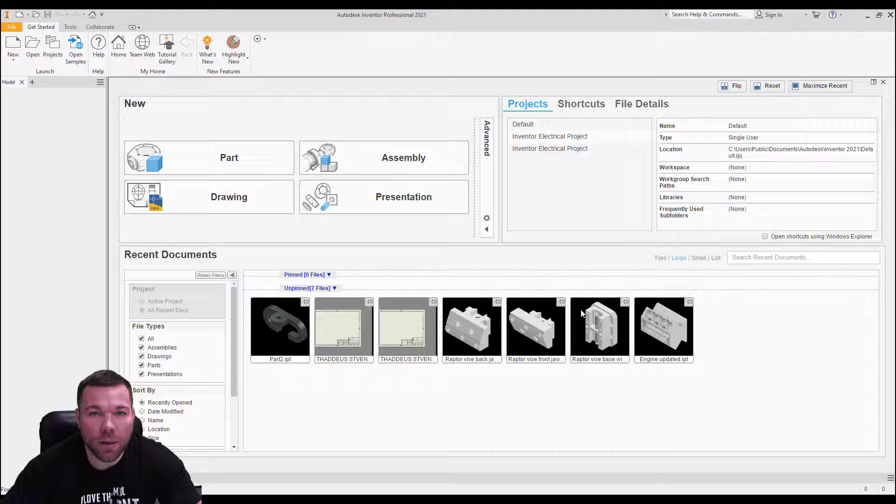The first thing I did was open a new part drawing, and we're going to start a sketch on the XY plane. As in past videos, we are not assembling these parts, so it's not critical necessarily what plane we create them on.

I'm going to go ahead and just do a rough sketch of this. It looks like it's 1 3/4 high. I try to get it kind of close to how big it is, just so there's not too drastic of a change when I go and apply dimensions.

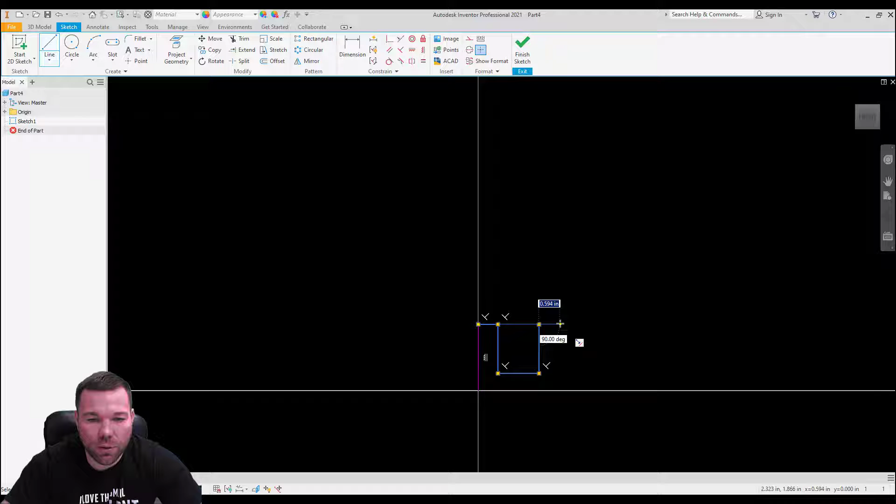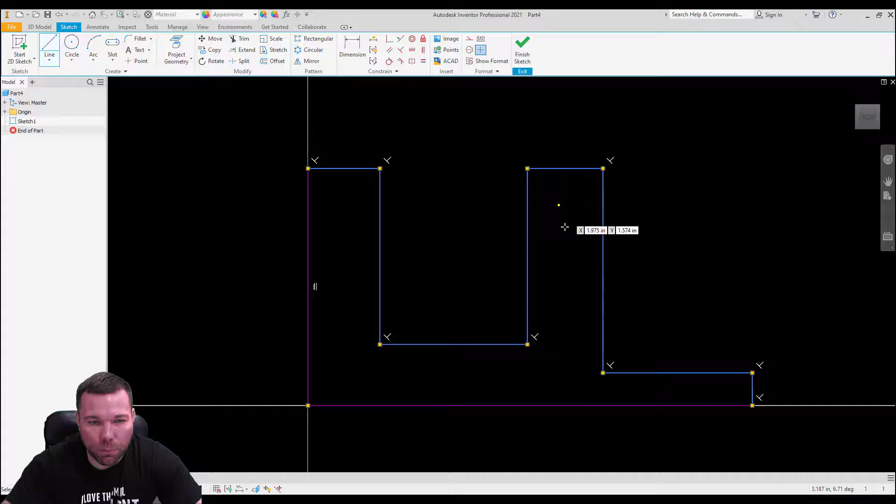You'll notice I purposely offset these, and that's because they are offset. If I had them in line, they would actually lock in line, and then it's sometimes a pain in the butt to get them out of line. So I automatically make sure that the profile is about as correct as I can make it.

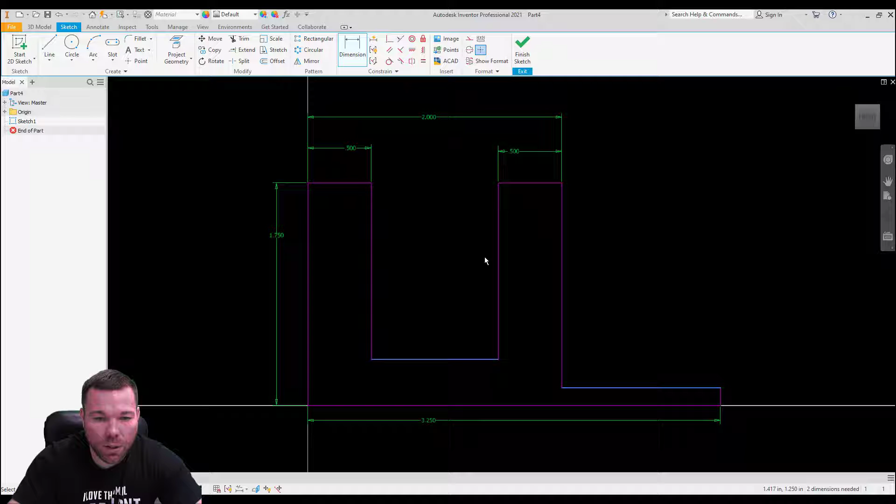So 1.75. This one is 3.25. These are 0.5. This is 2.0, and I believe this is 0.5 as well. This is 0.75 high, and I believe this dimension is 0.5 as well.

All right, so we are fully constrained. I'm going to hit finish.

I'm going to extrude this, and I'm going to do a symmetric mid-plane extrude. In this case, it looks like we're extruding at 2.5 inches, and by the appearance of the book, they're doing the same thing here with a mid-plane extrude as well.

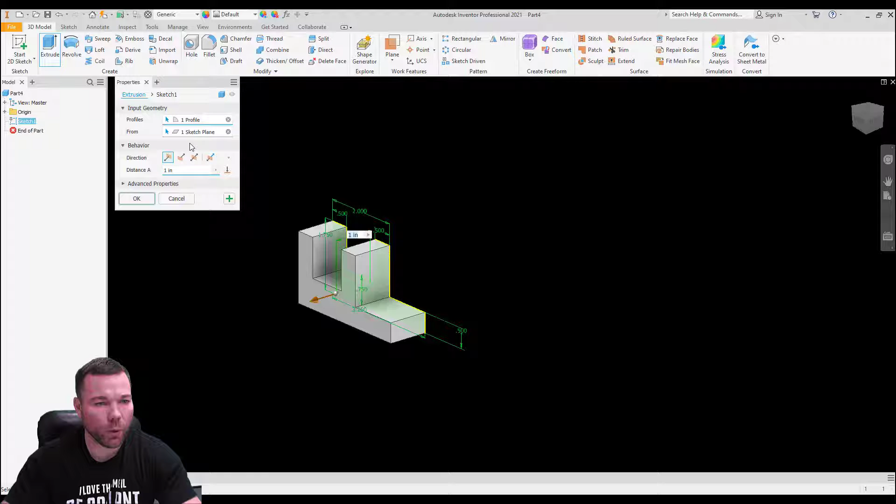So I'm going to extrude this 2.5 inches. Oops, I didn't do my mid-plane. There we go, change that to mid-plane. Okay, so there is my base solid. I'm going to name that base extrude.

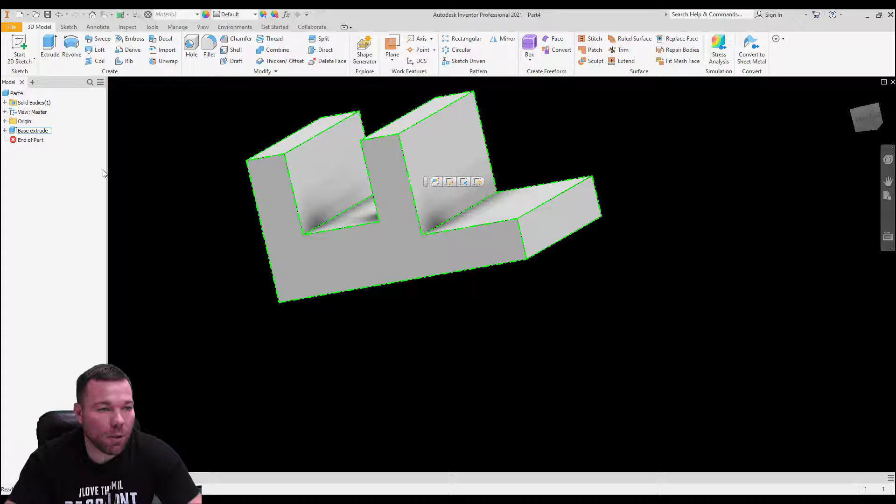Next, I believe we're going to be putting an arc on there. And yes, we are. So I'm going to left click on the bottom face and do a sketch on there. I'm just going to rotate that because I prefer it to be like this. So, to constrain this as little as possible, I'm going to snap it to the midpoint, and I'm also going to snap it to the corner.

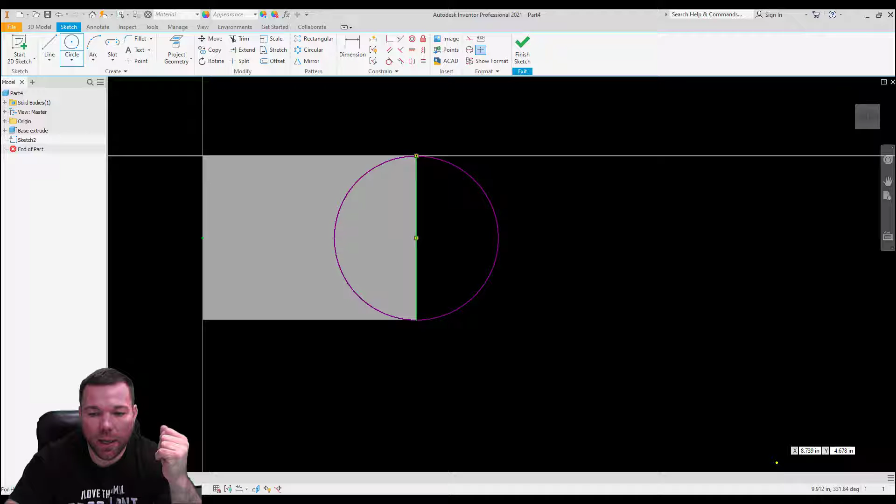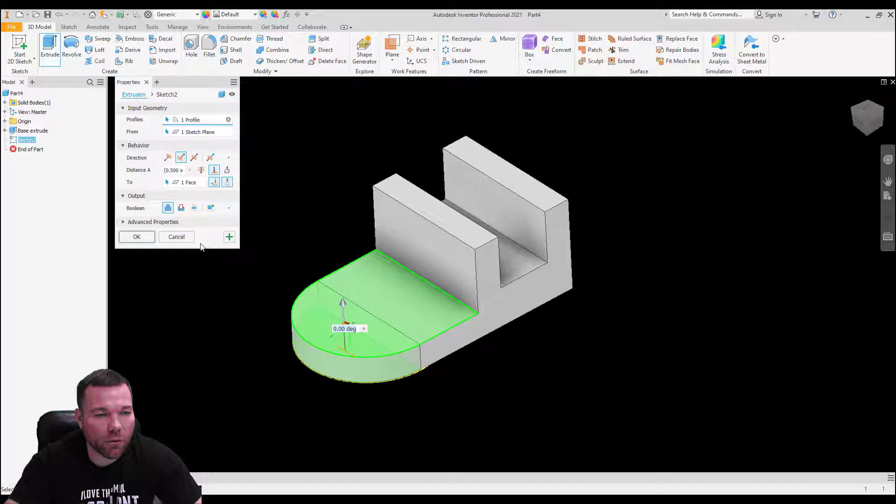You can see there that it should be fully constrained. Let me go back in there quick - fully constrained. All right, so finish, and we're going to extrude that. As you can see, it's going the wrong direction, so I'm just going to go the opposite direction, and click next, check. Okay, and there we go - we've got a good extrusion.

All right, next it looks like it's having us create or alter a dimension. So let me name this first - I'm just going to call this the semicircle.

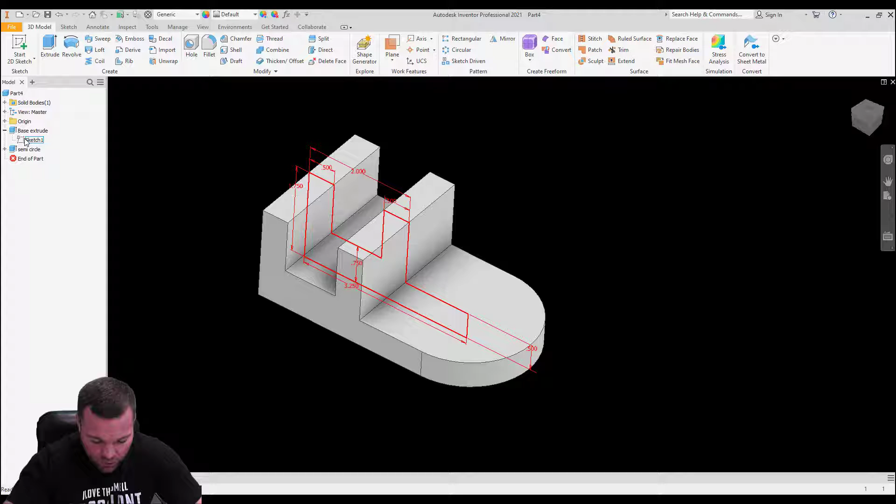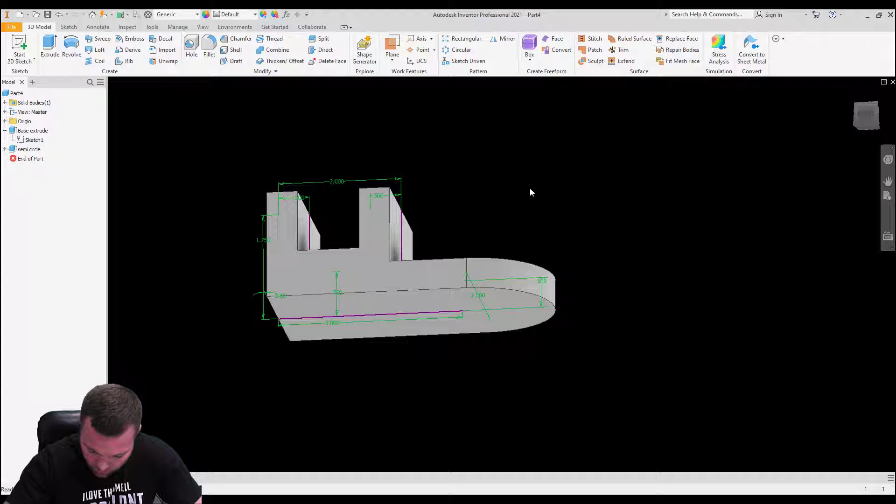And we're going to go back into our sketch here, and actually I'm going to right click and say show dimensions. Okay, so we have our 3.25, and it's telling us to change that to 3.0. So let's change it to 3.0, enter. And it's also telling us to change the 2.5 to 2.0.

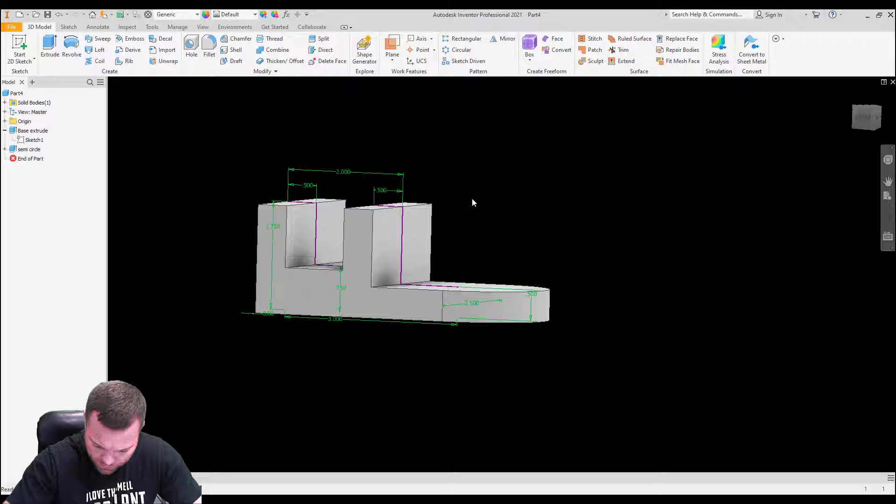Oh, I see. So it's saying the 2.5 to 2.0. I'm not sure where we have a 2.5 dimension. I think it's the width. 2.0. Enter. All right.

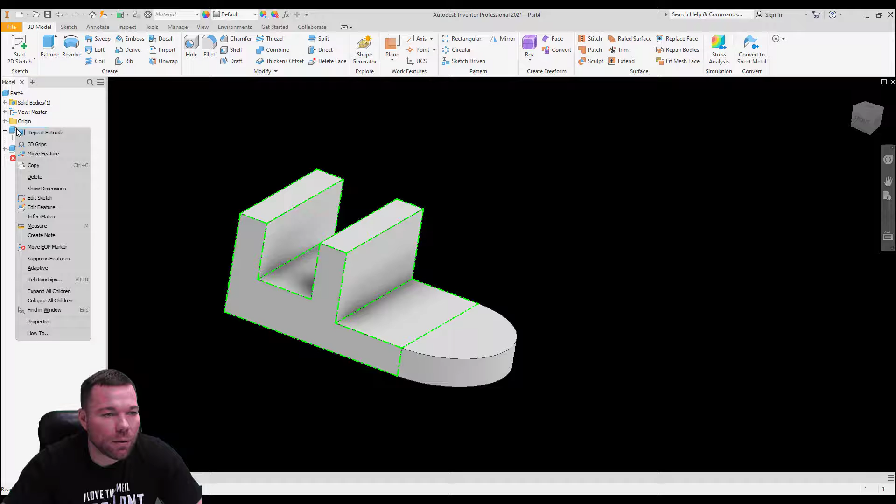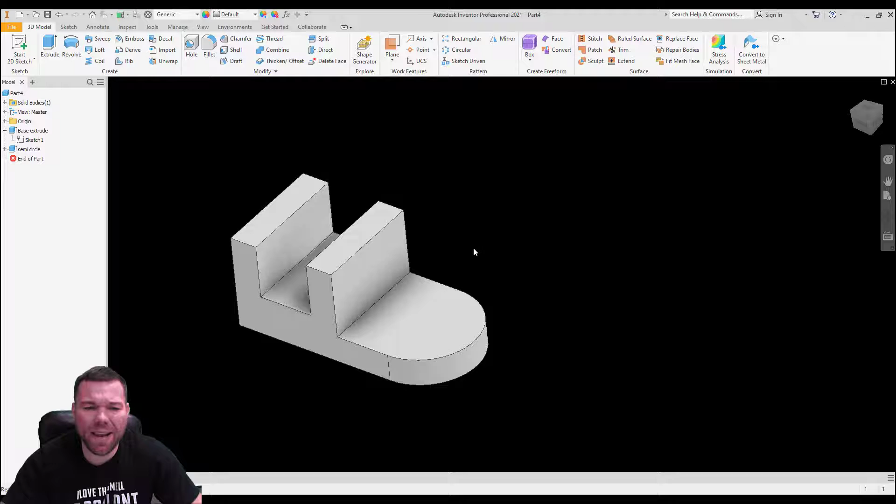Let's take a look at that base extrude now. So now it's 2, and of course our part got shorter as well. So if I go into the sketch, there's our 3 inches. So it's just another way of editing the sketch and the feature without actually going into the sketch.

Okay, so with our part edited, let's go. Oh, and sometimes it actually has you update these. So this update button is basically telling the whole thing to regenerate. But usually they regenerate on their own.

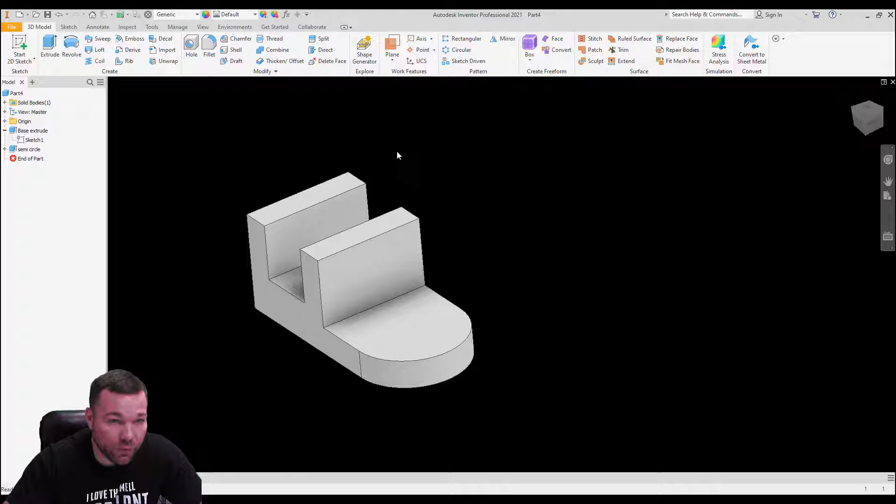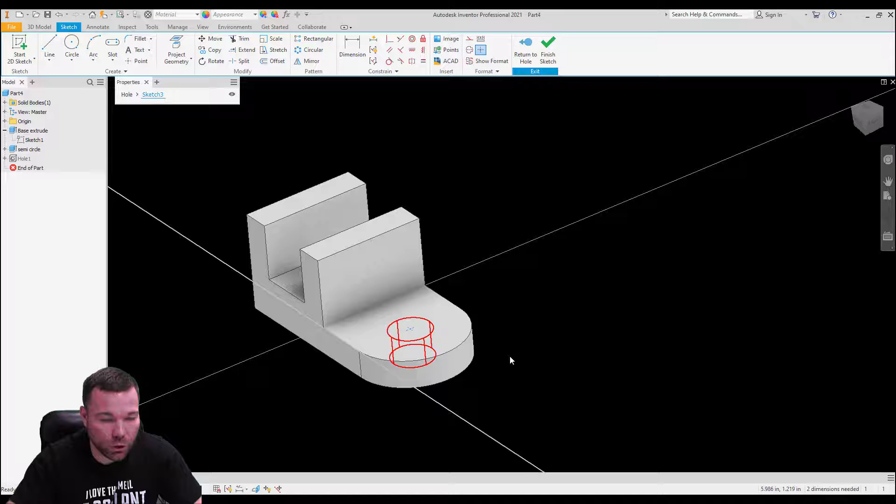All right, so this one here, we're going to use the hole feature, which I showed you in our last class, and we are going to do a 0.75 diameter hole. So I'm going to do a hole, none, 0.75. And I am going to go to my sketch, and we're going to constrain this thing. Now, one of the things that kind of sucks about this is you can't use your concentric command to constrain it, so you have to dimension this thing.

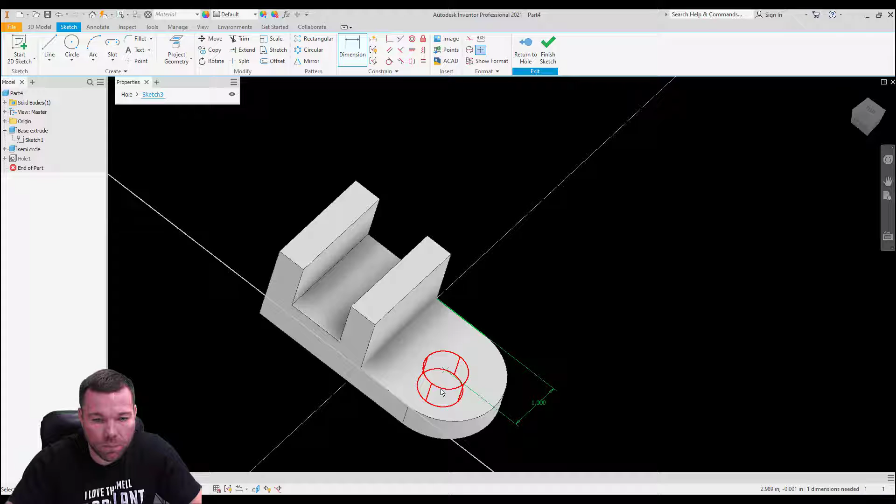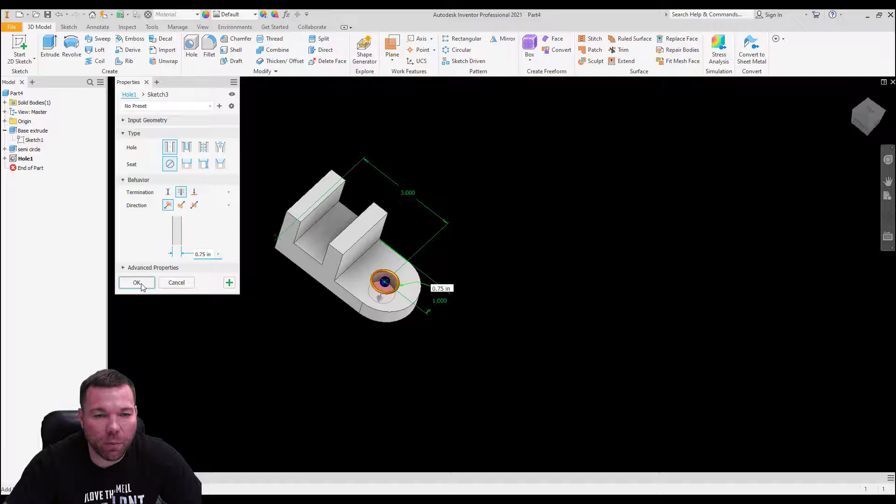All right, accidentally put another hole there. And there we go. So we have our hole feature created correctly.

Next thing we're going to do is we're going to do a cut through this face. So I'm going to pick that face. And for this, let's see what they have you do. Okay, so they do have you do a rectangular cut. So I'm just going to pick my rectangle, and I'm going to make sure I pick that line so it snaps.

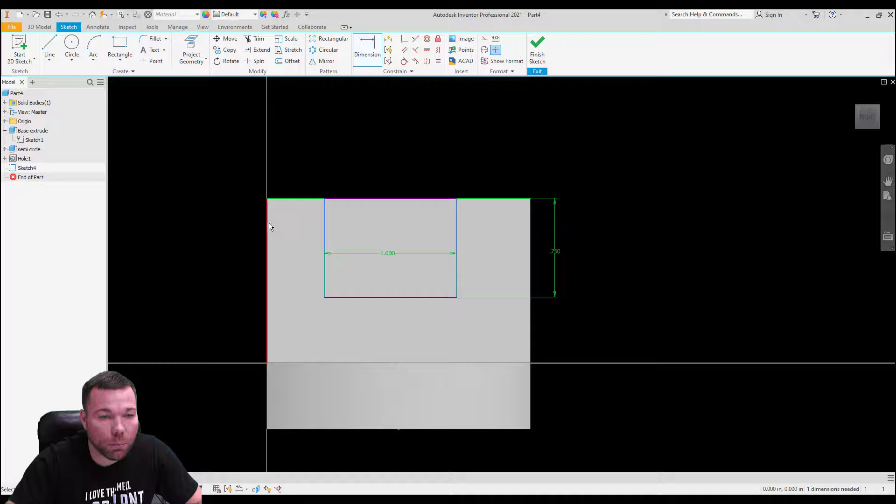And we're going to do a 1.0 by 0.75, and it is 0.5 locationally. Fully constrained, finish sketch, extrude. In this case, I'm going to go through all and reverse that and hit check. You can see there is my feature. All right.

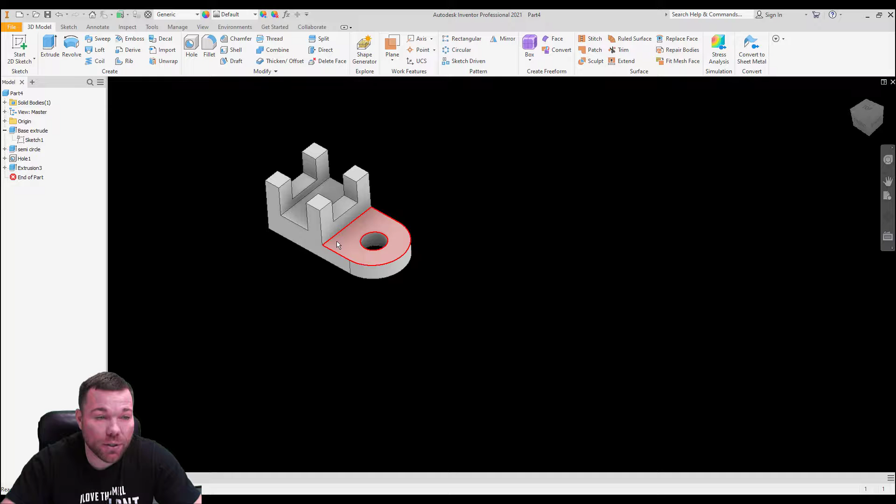Okay, so with all of that done, the next thing it's going to have you do is, looks like we're editing a sketch, and we're adding a fillet to this corner. So we can come in, double click on this sketch. Whoops, wrong sketch. Finish sketch. Let me name these quick.

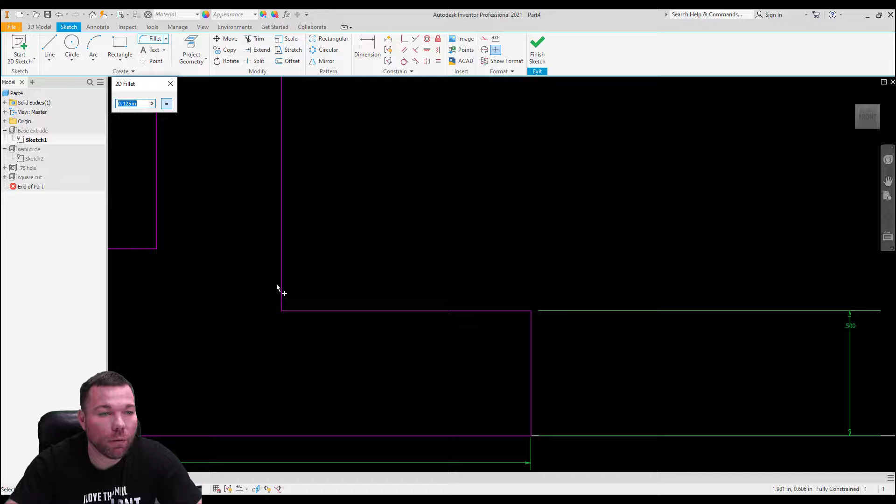0.75 hole. Square cut. Go to our base, and we need to add a fillet, which is right here, as a 0.25 fillet. 0.25, finish, and there we go.

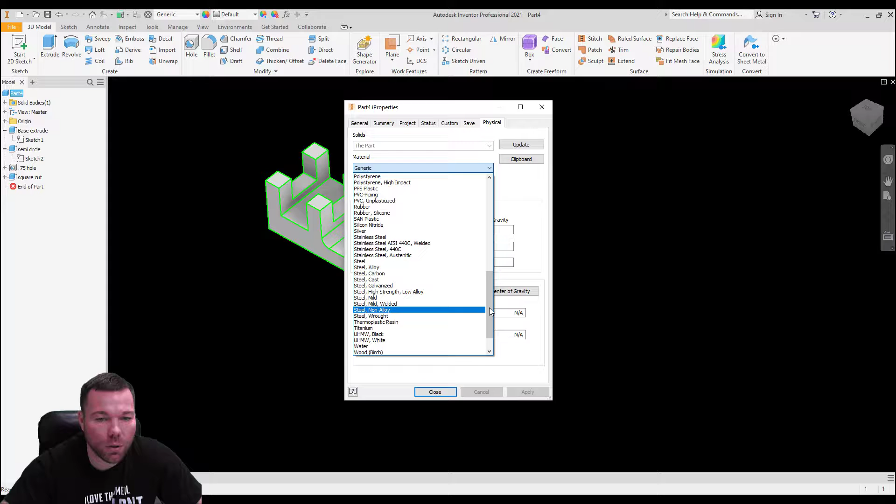Okay, so moving on, the next thing we are going to do is we're going to make this aluminum, and it appears that they want us to choose 6061. So we're going to go to our iProperties, if I can manage to click it. Physical, material, aluminum, they're in alphabetical order, 6061, apply, okay. All right, so we have all of the properties applied.

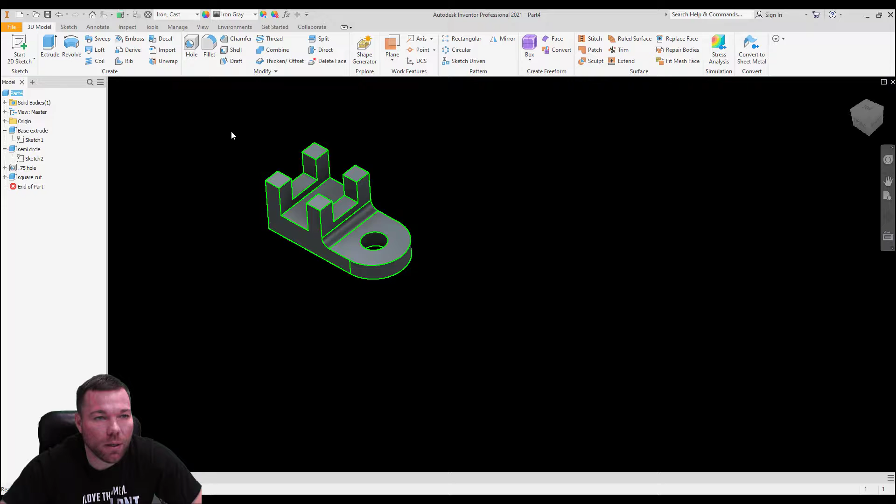Then it has you change it over to cast iron after that. I'm just going to leave it aluminum for now. I can change it up here as well to cast iron. And there we are.

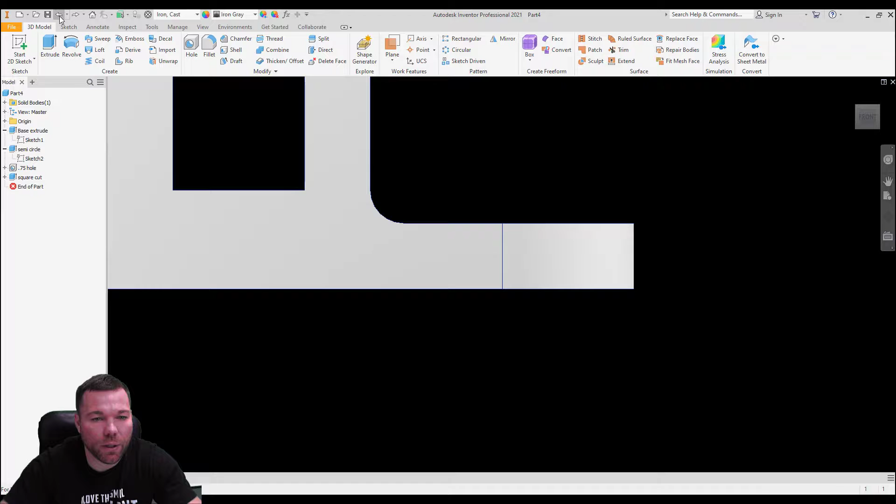So that is all there is to this. The only other thing that I might show you here, I'd like to show you, is if I go back in here to sketch, and let's just say I get rid of, well, no, I don't want to get rid of that, I'm just going to undo it. Okay, so I'm going to finish sketch. Let's take it back to cast iron again.

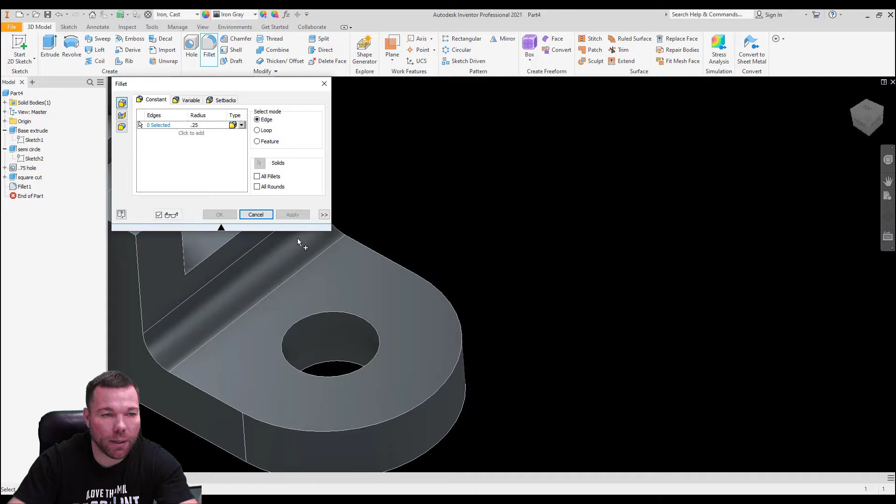The other way you can add a radius is to do it in the solids, the 3D model menu. We could add a fillet here, 0.25, and I could select that corner and apply. Now that creates another operation for us, so we don't always like to do that. It's probably easier, and better, just to do it in the sketch. But if you get in a jam, it's an easy way to put a fillet on something.